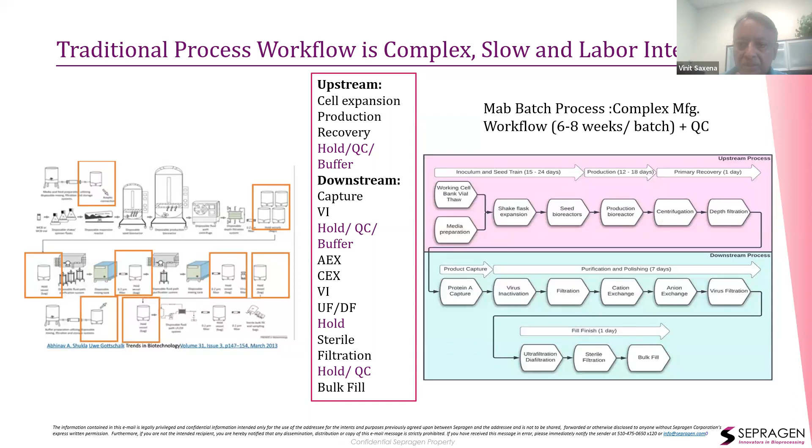So the entire batch could take easily 6 to 8 weeks, some cases more, some cases a little less. If you're doing fed batch, maybe a little less. If you're starting fresh every time, obviously more. If you're doing perfusion, you can cut it down considerably. So these slow batch processes are synonymous with long cycle times.

Since you have multiple steps that are transfer and hold points, where you go from cell culture to filtration to centrifugation to chrom capture to viral inactivation, you're taking samples at various points, and you have hold tanks where the product after each of these steps is being held. So until you get QC results, you often can't move to the next stage. It's very cumbersome, takes a lot of time, takes a lot of effort, and takes a lot of FTEs.

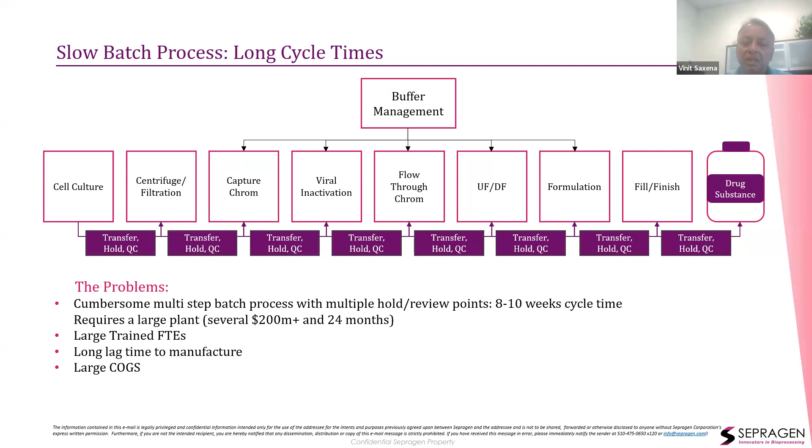And eventually all this filters down to cost of goods. So how many batches are you doing? How much is your output from the plant? How many people? What's the capital? What's the materials?

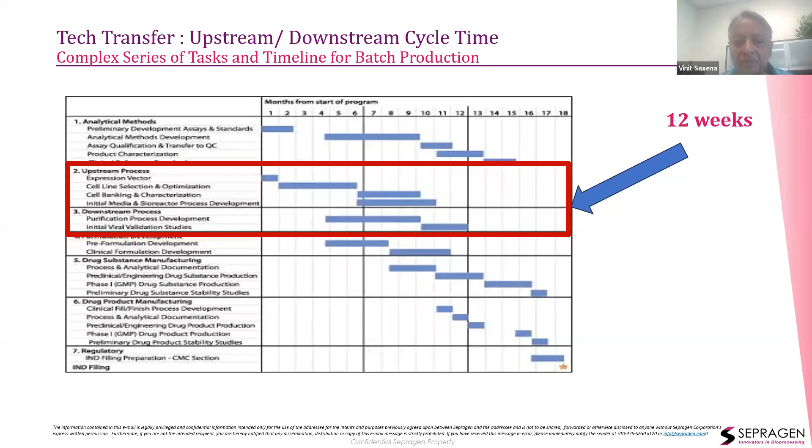There are plenty of examples from different companies who've given presentations over the years about how long their batches take and how long it takes to optimize. This is particularly true for CMOs, where they're going from one product to another. Each time, for the innovator company making the same product, things have been optimized, so they can go a lot faster. But for CMOs, it's particularly an issue because they have to start from square one each time.

Here's kind of an anatomy or cost structure for a typical plant. We try to simplify it: 8-week cycle time, plant output let's say 50 weeks, so 8 batches a year. If you've got some overlap between batches, you can get maybe 10 batches a year. A large capital investment, a moderate plant at $150 million, amortized over 10 years, so $15 million a year, about 70 people in this plant at a burdened labor rate, maybe as much as $180 an hour, that's about $25 million a year. Materials and utilities, about $10 million a year. The output from a typical plant like this may be 100 kgs, so cost of goods is $500 a gram.

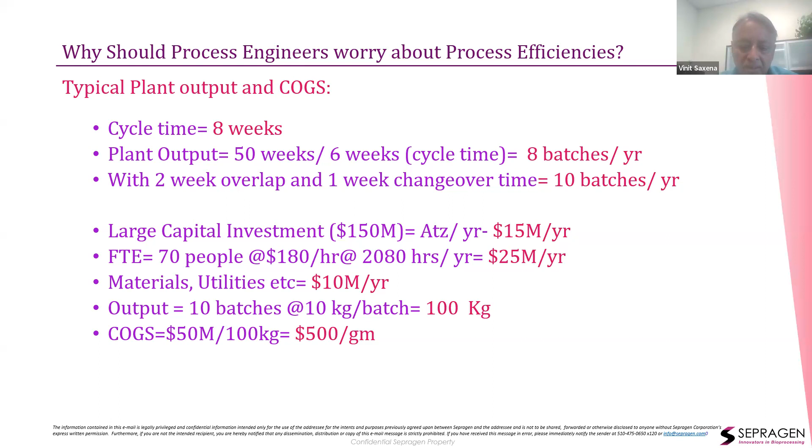So in the best of cases, that's about where we are. And of course, if these drugs are going to be more affordable, more accessible - this is just the cost, there's lots of regulatory and other overhead on top which is significant. So at the point of treatment, these costs become fairly high. In our world over here in the Western world, it becomes easier because of our insurance system and all that. But in the rest of the world, what we're calling the global South these days, it doesn't translate, and a lot of these treatments are out of the realm of affordability.

And of course, we as bioprocess engineers can affect that positively. So as we go through and design these plants, what constraints do our choices - from facility to process equipment, choices of the equipment, choices of the facility, choices of the process strategy - have on the plant output, on our FTE requirements and workflow? That's the conundrum of bioprocessing.

Bioprocessing intensification is a buzzword that's being used, but under its umbrella comes these kinds of answers, or at least tackling these choices as opposed to just doing a cut and paste. If somebody has to scale up, they merely cut and paste, buy bigger columns or bigger equipment, along the lines they've always been doing. Well, the result is that you're going to have what you had before.

We know that biomanufacturing people by nature are conservative, because we have to operate in a regulatory framework, and making any changes lends itself to scrutiny, to validation, to questions by regulatory authorities, by internal QA teams as well, which slows the process down and takes a lot of effort. So change is a big deal, and change management is a big deal in biotech, but it has fruits as well.

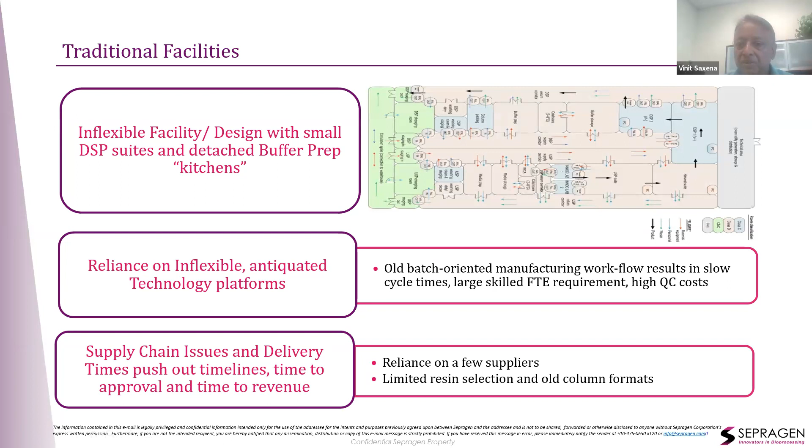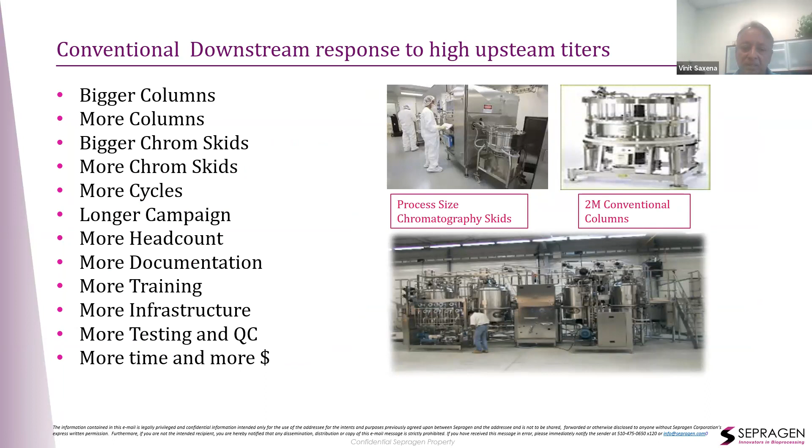Of course, there are new plant models out there, which I'll share with you, where that's been taken into account and streamlined so that you have buffer storage and more totes that you can use. But this is the conventional response, which is bigger columns, more chrom skids, more cycles, more head count.

So you're adding head count, cycles, more documentation, QC, etc. And the indirect consequence is that you're making more buffers, requiring bigger square footage of the plant, more gray space support, infrastructure support. So very often walls have to be knocked down, time frames are shifted back to accommodate these changes. Change doesn't come free of cost necessarily.

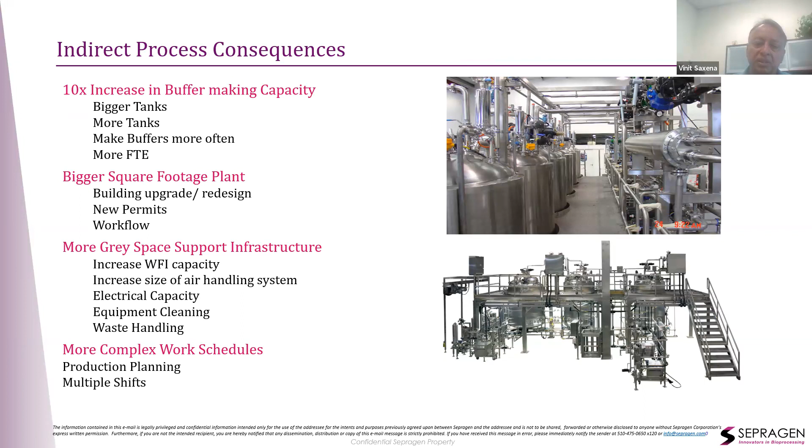So the topic today really deals with what are the choices we can make around equipment, what are the choices we can make around process strategy to really get ahead of the curve and not have these kinds of issues dog us when we are looking at scaling up.

So one is, of course, the choice of a column. Conventional columns work great on a lab scale. You can do a little modeling on little 3 millimeter columns. The problem is, of course, that when these are scaled up to a meter column or 2 meter column, the flow rates...

...you can whiz through these columns, you can have very short cycle times, don't necessarily work. And we look to guidance from vendors or manufacturers who may say, oh no, but in manufacturing you should have 20 centimeter bed height columns, even though you might be doing something in a little HiTrap column and it works fine.

Well, because we've got to pack these columns, they don't quite work as well if you have short bed heights. So all of a sudden, there are major changes being made that were not factored into the original design, and the pressure issues, large space requirements. Conventional chrom systems also tend to be kludgy, and you're just basically running flow through the columns.

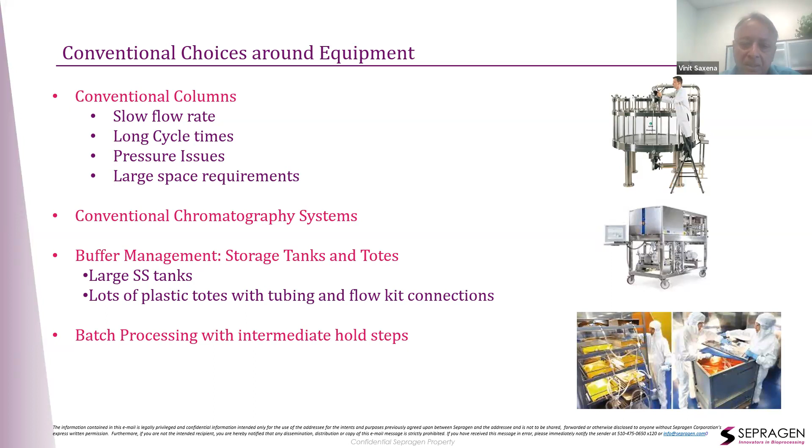And then, of course, there are hold steps between batches. So where do you store that material? So anyways, those are all the choices that come before you that you need to confront.

And so this is not our work - this is just work that you guys can do, but this is just work from literature where they show, like on the left top, you'll see this, a well-known CMO, which has 2 facilities.

They have 4 cell culture suites, 2 purification suites, 3 media and buffer areas, prep rooms. So they have to make 5,000 media buffers, 106 column packs a year. So you just look at - they have 3 production schedulers in these 2 plants. So lots of complexity around that.

But basically, the take home here is that you have 30% of the operations dedicated to buffer prep. And of course, lots of batches being done, so lots of scheduling activity. The batches are not separate - you can dovetail them, you can overlap them.

On the right, you see again buffer prep area, about 1/3 of the area of the entire plant. And BioPhorum did a survey, and people have gotten more efficient with automation and such. So I take this - I think we can do a lot better than this - but 2,000 liter buffer took 7 hours and 2 FTEs to make.

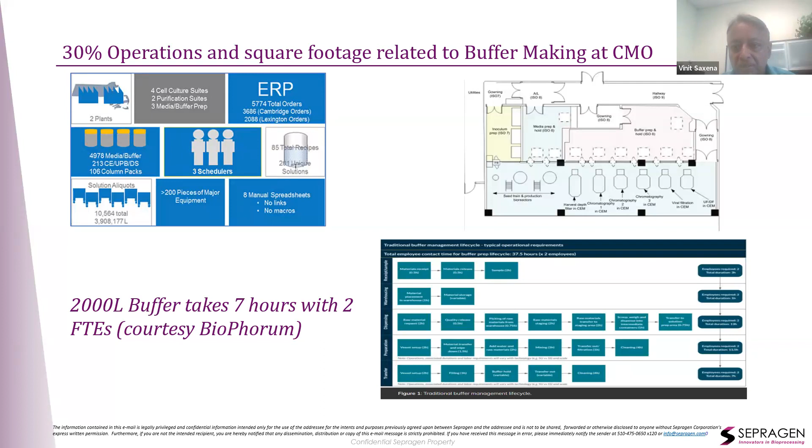But the point is we're spending a lot of time, not directly on process, but on non-process things. Column packing is another area which can be time-consuming, especially if you're doing a lot of packs. So people are looking at pre-packed columns as a result. Cleaning and validation of the plant can become a big deal, so single use has come about.

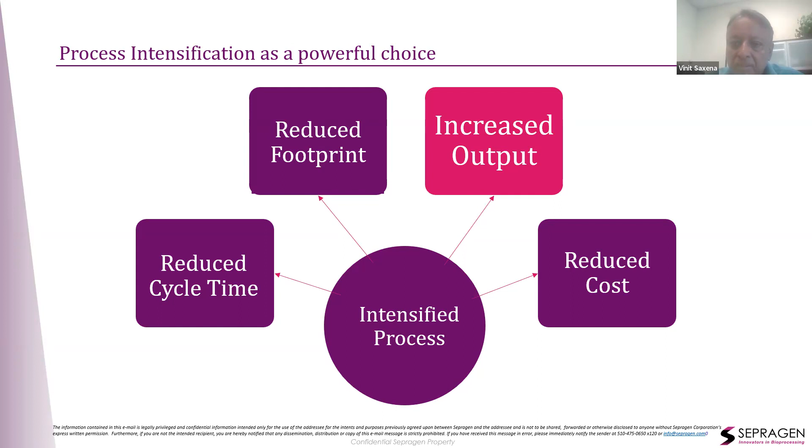So now we go to process intensification. Process intensification is all about reduced cycle time, reduced footprint, increased output, and reduced cost. In previous webinars, we've taken each of these topics and delved into them. The last webinar was about reduced cycle time by 4x. The previous one was about reducing plant size and footprint. The next one will talk about reduced cost. They all dovetail into each other, but it's good to unpack these things in more detail. So here we are going to talk about increased output.

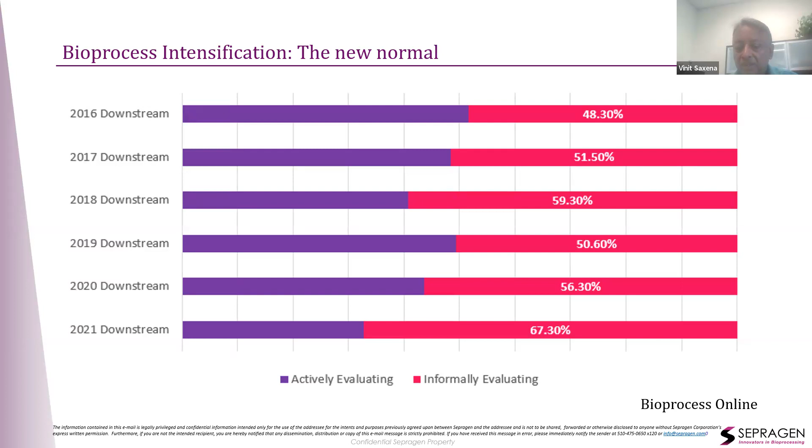And for some of you thinking about bioprocess intensification as something new - yeah, it's coming, we ought to look at it someday - well, that was the case in 2015, 2016. You had about 50% of people starting to look into it. And today it's become a real transformation where two-thirds of people are informally evaluating it, and one-third are actively implementing and evaluating it.

So what is process intensification? One is the need for continuous processing. We've been in the pharma industry with batch culture - everything has been batch oriented. You make things in batches, you qualify the batch, you validate the batch, you've got batch numbers for your batch release criteria. So everything's been batch. The FDA has told us now that they want us to transition.

It's guidance from the FDA, who have given us guidance to move to continuous processing. And certainly we see more of an impetus in the industry doing that with high density perfusion cultures - that's already starting to happen. Less so in downstream, but we have developed tools for continuous separations - continuous centrifugation, continuous chromatography, continuous ultrafiltration. People are starting to work on implementing and plugging these into different unit operations.

But that itself isn't going to carry the day, because if you implement a continuous operation in one place in a process train, and then downstream or upstream you've got batch processes, well guess what - it's like a weak link. The slowest part of the process is going to slow down the entire train. So process integration and connectedness are very, very important. We need to integrate all the parts of the process so that even the slowest part can be sped up, integrated, and doesn't become a bottleneck.

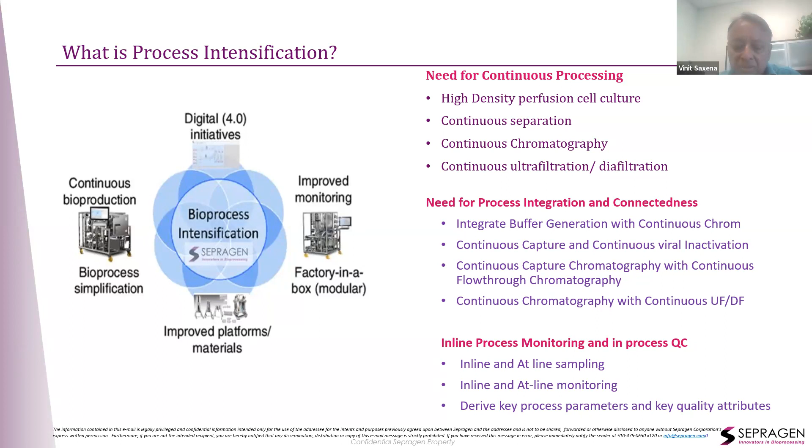So anyways, we find today that we are moving from fed batch to continuous upstream, which is shown on the top. And I think the idea now is really what a few pioneers in the industry are looking at - continuous process all the way end to end. There are very few factories that have actually done that, and I'm here to advocate for that.

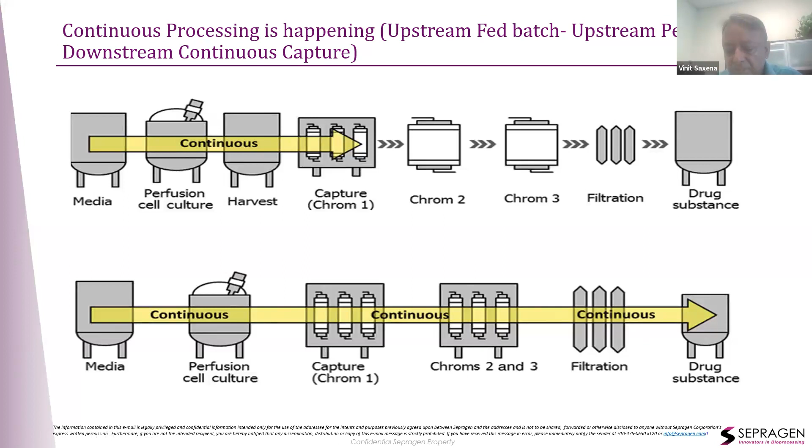In 2013, Janet Woodcock went to the Congressional Committee about modernizing biomanufacturing and bringing about continuous manufacturing platforms. And in 2017, CDER finalized the guidance for the move to continuous, bringing about innovation and modernization in biomanufacturing.

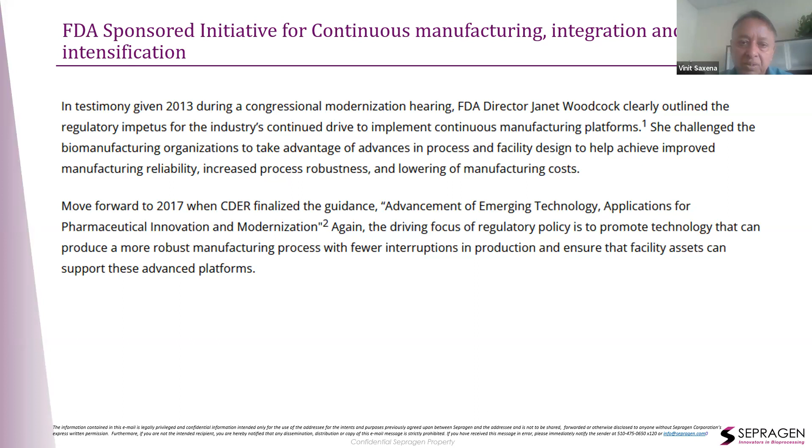So that all relates to continuous manufacturing. You have the FDA behind you, you don't have to convince them, the guidance is from the FDA. And of course, as with any change management, you can't do it willy-nilly. You have to ensure you're still going through change management appropriately and validating the changes you're making, whether batch or continuous.

Column sizes can be reduced by as much as 10x. Buffers don't have to be batched in large tanks because the process is always going on continuously. So you can have ongoing buffer needs, continuously generated in smaller quantities and smaller flow rates, as opposed to waiting 4, 5, 6, 7 days when a huge batch comes, and then having to make all these buffers and process them right away.

Until that batch comes to a particular unit operation, it's not being used—that part of the facility is idle. Then suddenly the batch comes, it's used, then it moves to the next unit operation, and the first one isn't being used at all. So the efficiency of usage across the entire plant in batch operations, from that perspective, is very poor.

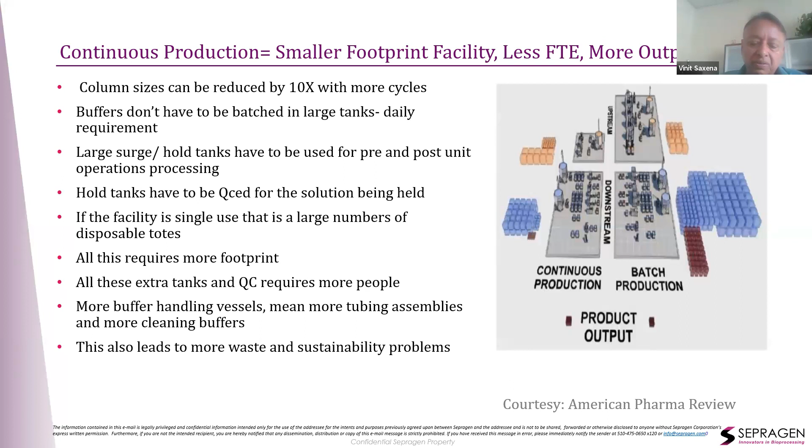But in continuous operation, that's not the case, because you're continuously running the process. In each batch, you're not taking out all the tubing and bags and tossing them, which is a big sustainability issue in the US and Europe, and will be more so globally. So I think we are being good global stewards in terms of sustainability by moving to this continuous production strategy.

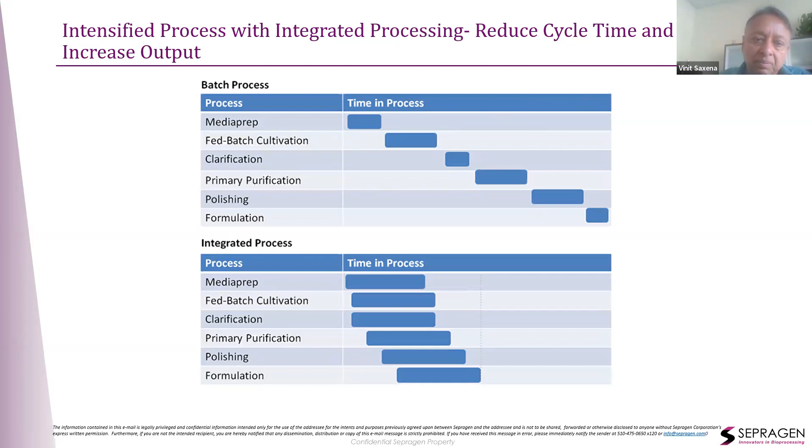In batch processes, everything is staggered, not integrated. Even in continuous, things are happening together—there might be a small amount of staggering, but you can see the whole process time is significantly shorter.

There are different strategies with multiple unit operations, depending on titers—multi-column processes, two-column, three-column, after assuming you're running a perfusion bioreactor going to continuous clarification. Then you can go to a simulated moving bed with maybe 4 or 3 columns, or continuous steps of a Pro-A step, an AEX step, a CEX step, AEX and HIC, or Pro-A mixed and AEX. These can be somewhat staggered, moving to nanofiltration last, where we remove salt.

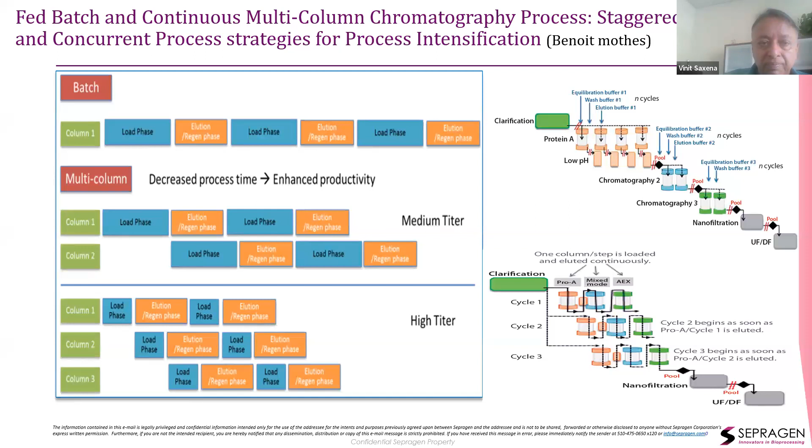So how can Sepragen simplify your process? We've given you a sense of the issues with current processes and what you can do with continuous processing to reduce FTEs and increase plant output. What can Sepragen do in this regard? Well, there are lots of novel things—some old, some may be novel.

One is, of course, columns. You don't want column flow rates to become an impediment or bottleneck, so radial flow columns can be used. These have been proven—for people interested, you can contact us to discuss. But you can typically reduce the cycle time by 4x.

The main thing we're talking about here is continuous chromatography, where you can reduce cycle time significantly by continuously using 2 or 3 columns—one being loaded while the other goes through the wash, elution, regen cycle, flipping back and forth continuously. So you have continuous product coming out all the time, and your harvest is continuously directed to the columns.

And sometimes you may have 3 columns where the output from one column flows through to the second column to maximize the capture of the first column, while the third column is going through the regeneration process.

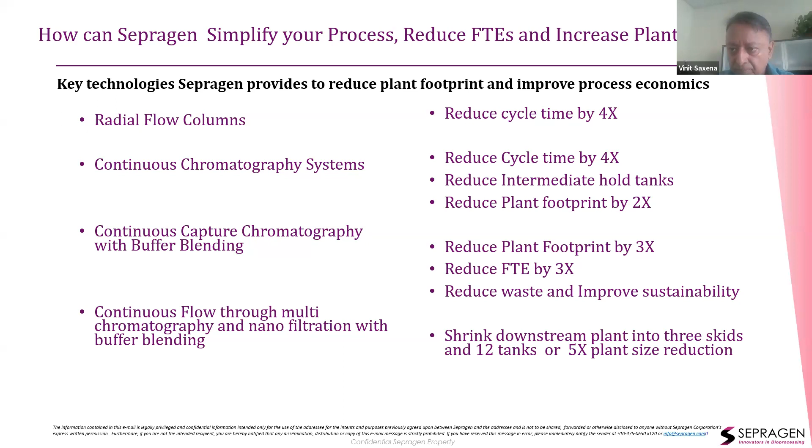And then you can shrink the plant down further if you take this continuous capture and integrate it with continuous flow-through chromatography, again with integrated buffer blending and nanofiltration, all on one skid. So you're getting essentially closer to a plant-in-a-box concept, where these things are integrated and the buffers are made on demand, so you can be far, far more efficient. We've done several projects like this, and you're welcome to talk to us about your requirements.

So I'll quickly go through what we have in the way of our continuous Chrome systems with integrated inline stock buffer blending. We are calling these systems QuantaSep Fusion - Fusion Elite and Adept Elite. The Elite means we have integrated stock buffer blending, and the Adept means you can still have continuous systems in single-use flow formats.

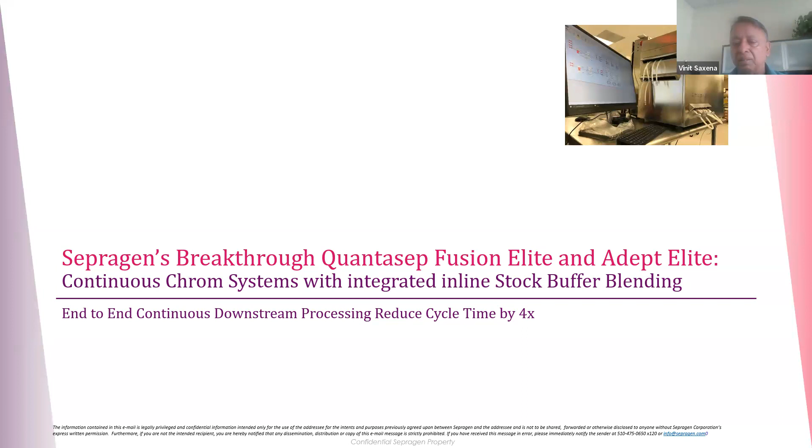So you can remove the entire tubing, or you can install one with all the sensors which come sterilized, and remove them. So you can have single-use and continuous, integrated with buffer blending.

In this particular case, we don't do that with the bench scale systems, but this is a bench scale system. The orange just shows on this P&ID, or graphic chart on your computer screen running the process, the harvest going from one column to the second, while the blue is the buffer going through the first column, which has been saturated, and does the wash solution, regen, etc.

And you've got all the standard sensors of pH, conductivity, UV, etc., and we've got automated recipes. So lots of different recipes can be run using these machines, and you can look at the chromatogram trends, change valves, all that stuff. This is meant for manufacturing, so the software is 21 CFR Part 11 compliant.

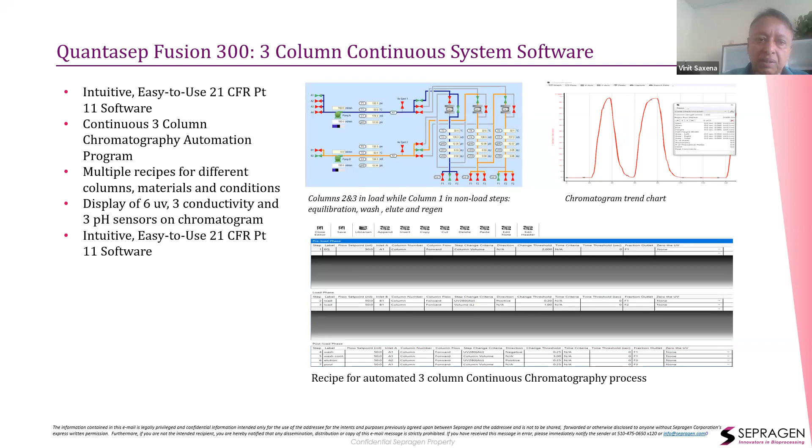So what is the difference? People often get confused between inline buffer dilution and buffer stock blending. Inline buffer dilution simply means you may make a 10x or 15x concentrate of the equilibration, wash, or elution buffers - though sometimes you can't do that with elution buffers, because if you're eluting with 1 molar salt, you're not going to have a 10 molar salt concentrate you can dilute tenfold. These concentrates are then diluted with water in the Chrome system to give the final 1x buffer.

Sometimes you can do the dilution and it works fine, but the pH may be off, so you have to deal with how to handle it. Some of these systems can't run gradients - we can run gradients, no problem.

With stock buffer blending, we have actual concentrate of the acid and base component of the buffer and the salt. So if you have a monobasic phosphate solution, 1 molar, and 1 molar dibasic phosphate and 3 molar salt, you can simply dial in, like, I want 0.05 molar phosphate at this pH, and the system will blend those in the right flow rate in line.

This gives you that buffer on demand with the right conductivity and pH, while you're running your continuous process. You're not going to make that buffer, put it in a tank, and then take it to your continuous process system. No, these concentrates are just hooked up online, these stock solutions you can get directly from a factory. Just hook it up online on the skid itself, and make all these buffers. If the buffer is out of spec, it goes out of the system for a minute or so until it hits steady state, and then that's delivered to the column. Very simple.

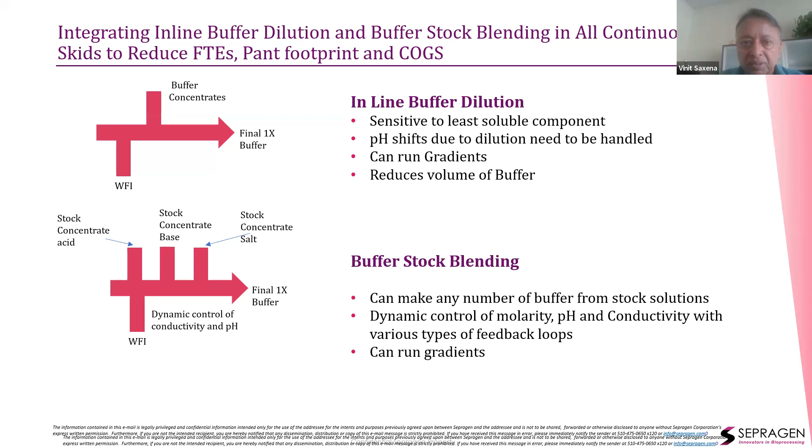We have continuous skids. Down here, for instance, this is a 2-column skid running in a pilot plant. You see these different outlets - that's WFI, acid component of the buffer, base component, and then salt. You have different outlets, so you can actually have multiple buffer systems - acetate buffer with sodium acetate and acetic acid, or phosphate, or tris. So it's not just one buffer, you can make multiples of these buffers.

The second skid here is a flow-through skid, where you're going after viral inactivation through an AEX column. Then the salt is adjusted and the pH is adjusted in line, prior to going into the AEX column in flow-through mode. Then it goes through a HIC column, then through a nanofilter, or it may go through a CEX column, while all the buffers for elution are also being made on that particular skid. So lots of integration of these systems enabling continuous flow through.

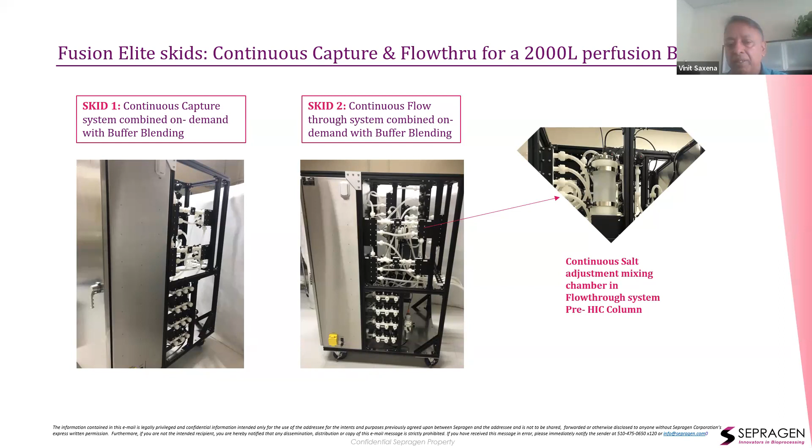So basically with these two skids, you can connect them to a perfusion bioreactor, let's say with a cell separation device, and go straight into your capture flow through, and then pre-TFF. Very, very powerful, very compact plant.

This is the HMI picture that you're going to be running. That's your harvest line going through either column 1 or 2. On the left here, you see pump W, A for acid, B for base, and pump C for the salt. These are run in different proportions to give the right buffer with the right molarity, conductivity, and pH, which can be sent to the column that's been saturated while the first one or the second one is loading.

You can take samples pre-column, you can remove any off-spec buffer, and your product is collected here. We can also do viral inactivation and make sure that the pH in the elution tank is at the right pH and held for the right amount of time before it transitions on to the next skid.

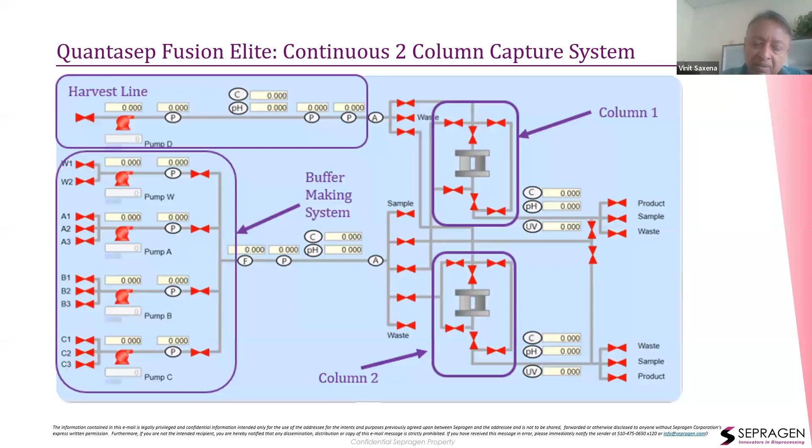And the next skid is this, where again you have your buffer blending, and this is the raw material at the bottom coming right in, adjusted with the pH. It goes through the AEX column, then again adjusted with the salt, goes through the HIC column, going through the nanofilter now. Again flow through mode, so everything goes one pass through the column. Potentially can be connected to a single pass TFF as well.

We've got different recipes, automated recipes that you can write for both of these columns. We've got event log, alarms, inline calibration, controlled access. We can connect to somebody's DCS system through OPC UA, can upload data. We can connect to a network, we have login authentication connecting through a network. So we have a whole software team here, PLC team, that can work with your particular engineers who are designing the process and implementing the project.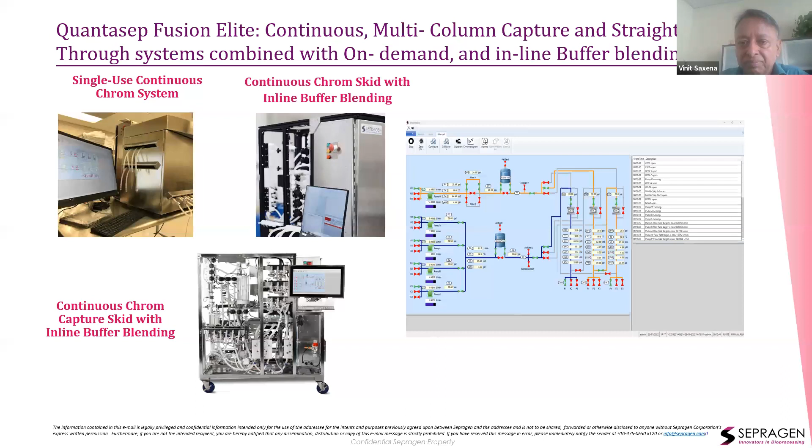So the software and all that for that has been developed. We used the same philosophy a few years ago when we were called upon to do one of the largest skids in the world, 125 liters a minute chrom system.

And making buffers at that scale would have been really problematic because you're going 7,500 liters an hour. It was incumbent that, and they didn't have in that plant the capacity to make the buffers nor the square footage. So we created this machine with 5 different pumps so that the buffers could be made in line along with WFI and harvest.

And regardless of what the buffer was, whether it was 200 millisiemens or 175 or 150, you can see the parameters, the tuning was done such that in very short order the particular set point was met. It was always delivered to the column at the right pH and the right conductivity.

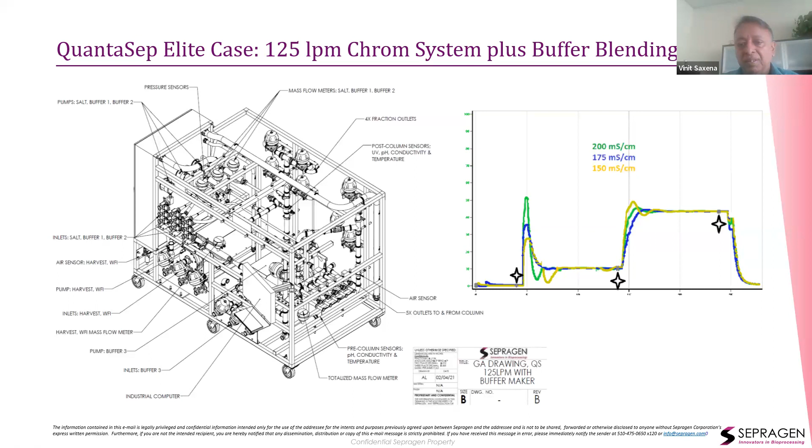So that's the other thing. If your input is slightly off, which may happen with buffer making, the system's smart enough to ensure that the output is always the same. So that was on a very large scale.

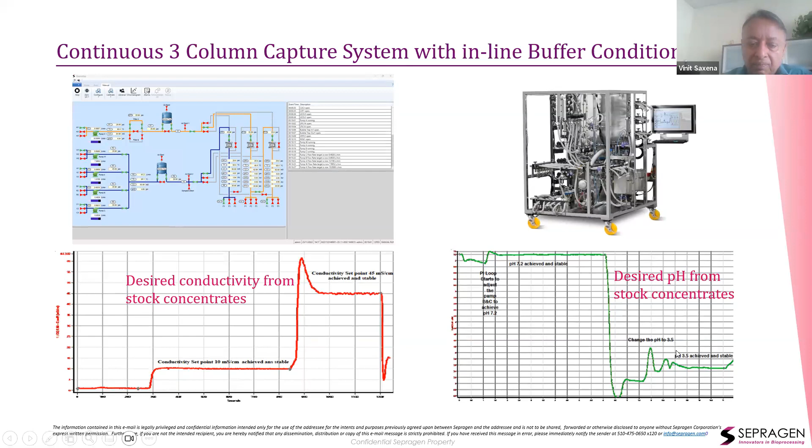And then there's the wash solution, the same thing on the pH. You can just go from 7.2 to 3.5 pH very, very quickly. Not easy to do, but we can go both ways very fast.

And then lastly, for some of you who are interested, we'll just touch on radial flow, though that's not the main topic.

We had said conventional columns are slow. In radial flow columns, the flow goes to the entire outside wall of the column and travels. There are two concentric frits where the resin is held between these two frits, giving a very large surface area over which you're applying your flow.

The flow is diverted to the entire outside wall of the column, goes through the outer frit, through the resin, through the inner frit, and out the bottom. So very short beds - the bed depth now is the radial distance between these two frits.

And for binding and elution types of separations, which is ion exchange, affinity, and all that, it gives you superior performance, higher throughputs, and lower pressures, and it's eminently scalable. In fact, linearly scalable - so if you double the height of the column, you have twice the area, so you can run twice as fast.

The bed height, which is the radial distance, remains the same, so the back pressure remains the same. And because the volume of resin has doubled, you can load twice as much. So everything is scaled up in the same proportion.

And this is data just from a study that Genentech did and shared with us - with conventional axial columns, their runtime was 8 hours, whereas with the radial flow column, it was 2 hours.

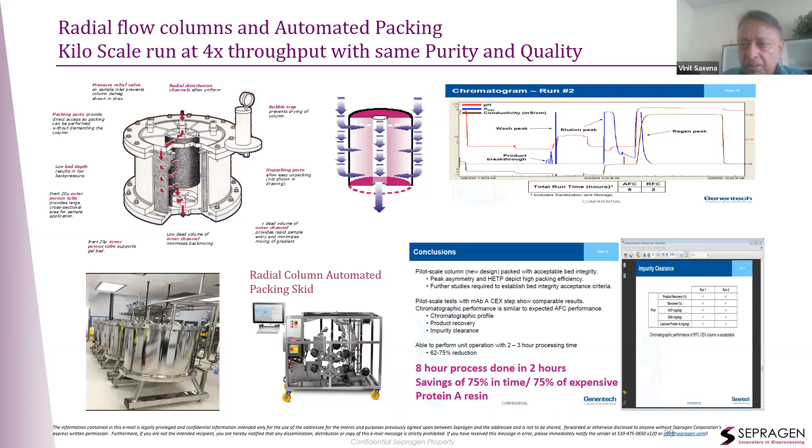As far as the continuous process is concerned, you can see that you can streamline your facility very easily. Here are the stock solutions that are prepared, the media, and then upstream, downstream, post-viral processing, because on your chrom skids you basically have concentrated stock solutions.

So you don't need big storage spaces for totes and studs and management of the buffers. You don't need any of that. And you have continuous processing going from one step to the next to the next. So your footprint is down, the FTEs are down, and of course the output is significantly higher.

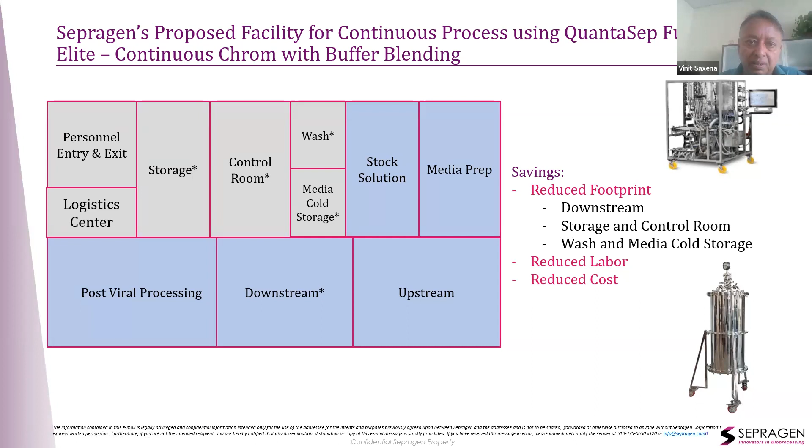So what is the output? Increasing plant output by 4x and reducing COGS. So now, even if you have some hold points, you're running continuously, so you're continuously producing product.

But maybe the continuous process is still TFF or till the concentration step, but not really bottling, so you still have a batch component to it. Let's say the cycle time is 2 weeks, so now you're effectively doing 50 weeks, 24 batches. And because your facility is much smaller, we've taken the facility down by a third because you don't need all that buffer management.

The chrom systems themselves are much smaller, columns are much smaller, so your amortization is 10 million a year. You can run this with about half the FTEs, so that's 12 million a year. Material and utilities will still be the same. But the output of the plant has gone up by 4 times, and the cost has gone down from $500 a gram to $130 a gram.

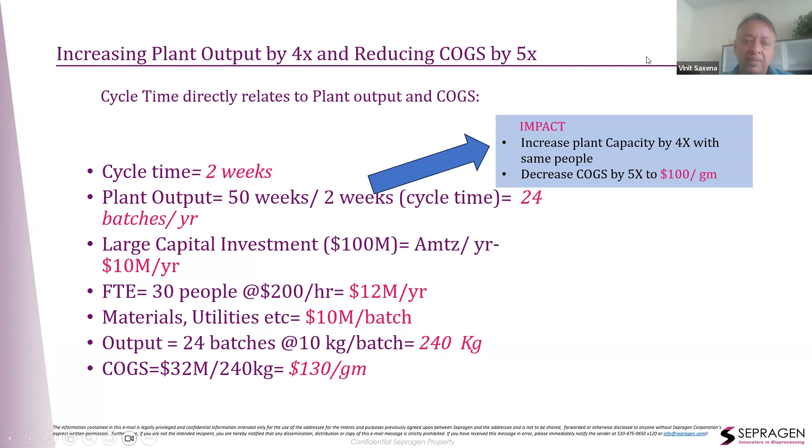So again, major reduction in cost, increase in plant output, and increase in efficiency. This is the future. The future is coming to us, whether you embrace it or not. Other companies will, and your competitors will. So we are here to support you.

As you look at going from this process, which is at the bottom, kind of a kludgy batch process, to continuous, you can see where we can support you, whether it's in continuous capture, continuous flow-through columns, etc. We are happy to hold your hand and work through whatever issues you might be having, and we can have confidentiality agreements signed and discuss how we can support you in making your process more intensified.

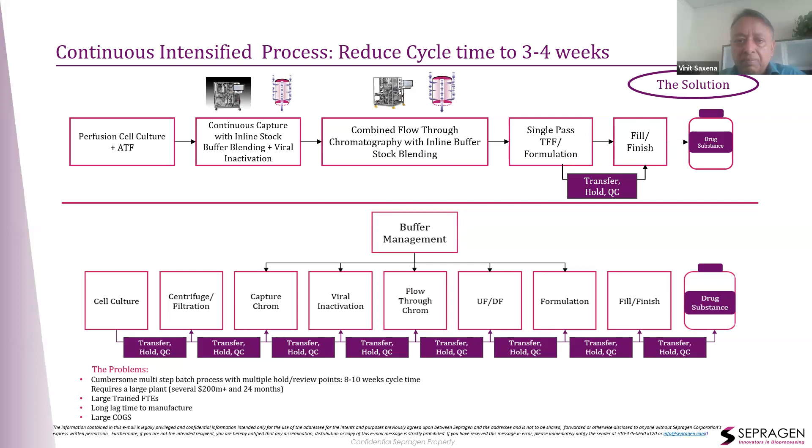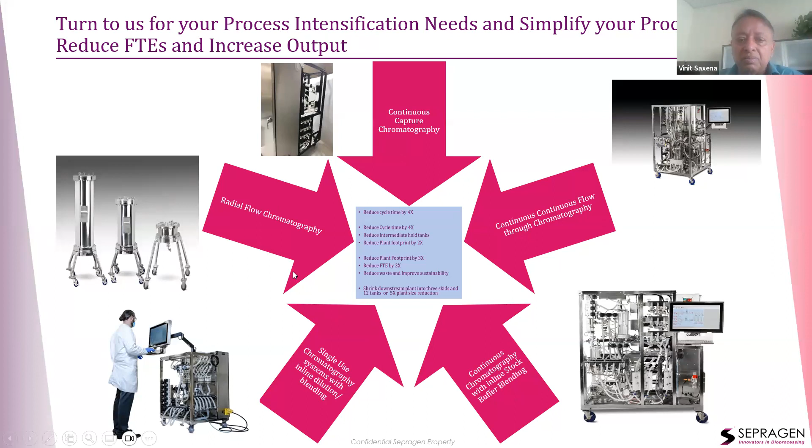So in conclusion, whether it's with continuous capture chromatography, continuous flow-through chromatography, continuous chromatography with inline buffer blending, or even traditional chromatography with inline dilution or inline buffer blending as part of the chrom skid, we can do that. We can provide you with single-use systems and radial flow columns, all of which go to intensifying your process. That's our commitment to you, and as a company, we deliver what we promise.